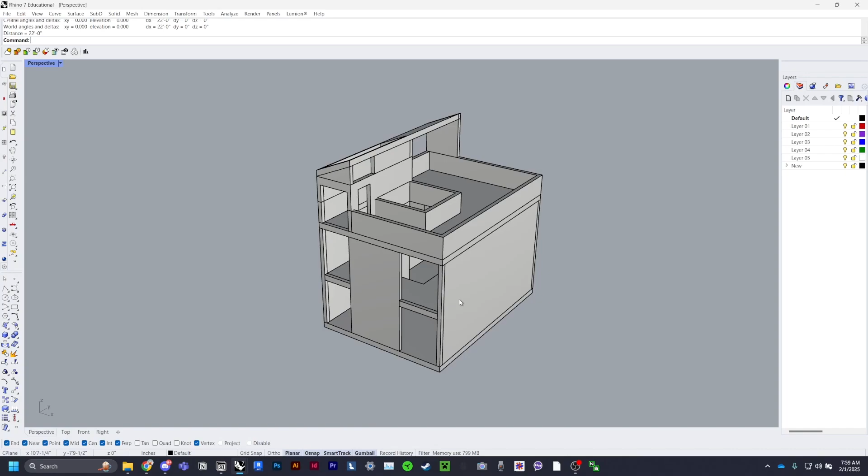Once you have your model in a separate Rhino file, select the layer you'll be working in, so 1/4 inch, and start making the floor, because every model needs a floor. Unless you know what you're doing, I recommend just starting with a floor.

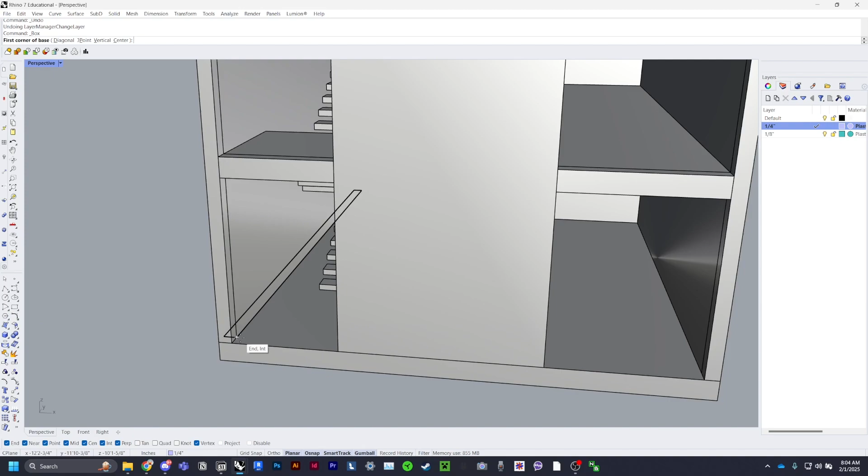Because I know it's 22 feet wide and 30 feet long, I'll click the box command to make a box that is 24 feet long, 32 feet deep, and 1 foot thick. Now I can move this into position by going from the inside corner 1 foot and minus 1 foot, and that's my base.

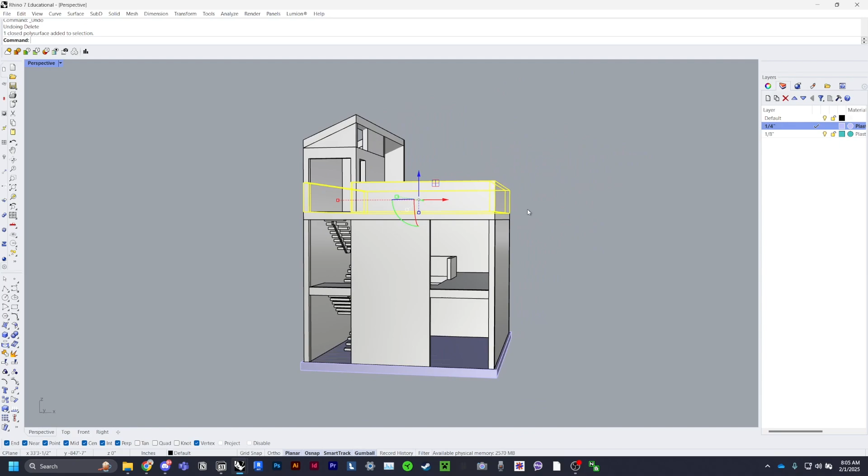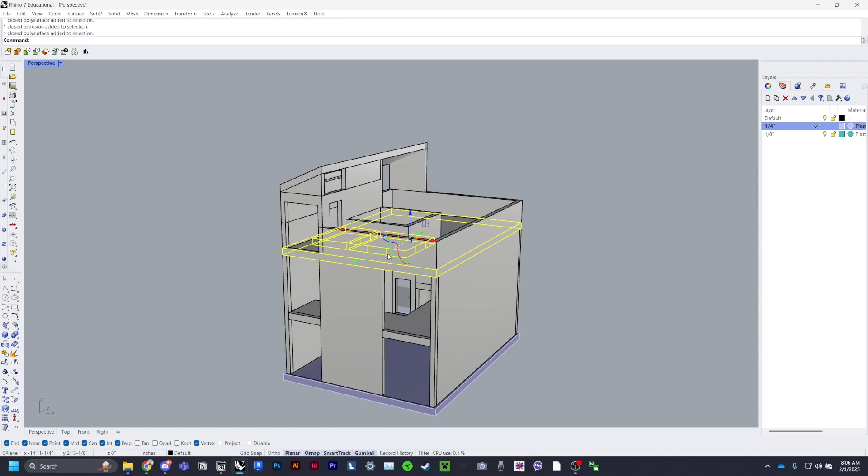In terms of how I want this to look, I want to be able to take off the top. So this top layer and the floor will be pretty much identical, except for the holes in the roof layer. This also means nothing should be connected to the top from the bottom or vice versa through this layer, unless you have a key feature, which I will go over.

For example, I want this wall to extend all the way through. Next, I'll start with the walls because those are relatively simple. Remember, I'm only going up to the bottom of this layer, because I don't want things connecting through the layer that I'm going to take off.

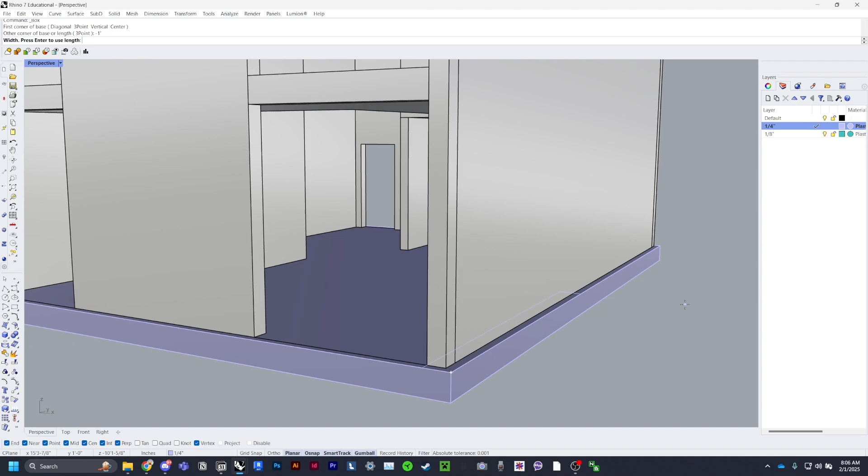So I'm going to start at the corner and go -1 feet, and that'll get me my wall thickness, and I can go all the way down here to this end. Now when I do -1 feet and 1 foot, those measurements might not be exactly like your model, because we might be designing in different directions. That's fine, just find out which way your model goes.

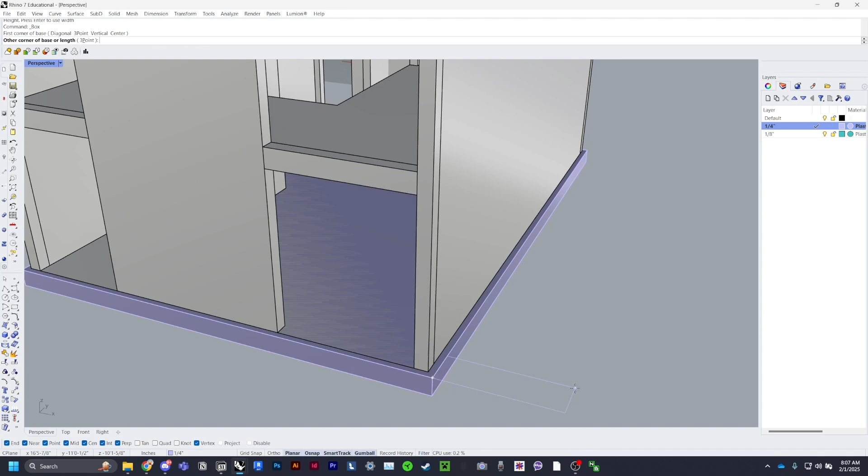For example, if I put in 1 foot here and then 30 or 32 feet, it's going to be to the right of my model, even though that's not where it is. If this ever happens, you can just use Move command and put it in place.

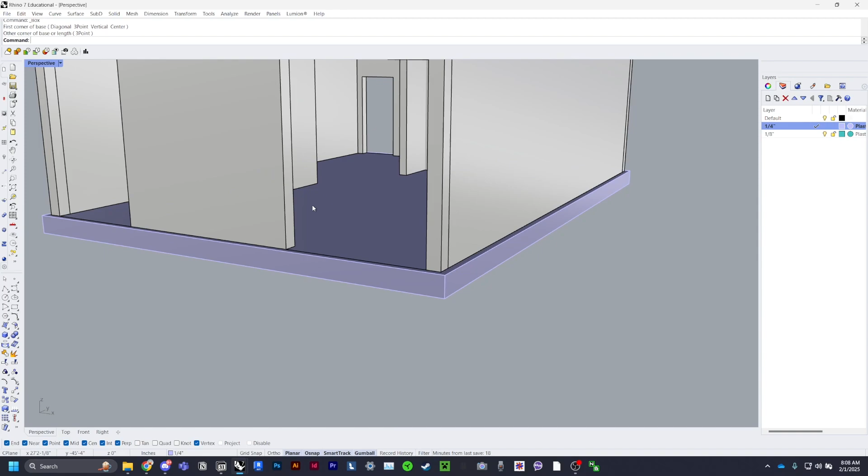Back to my model, -1 foot, that's inches. So if that keeps coming out in inches, you can go to File, Properties, Units, turn this to feet, okay, and scale model by that much, yes.

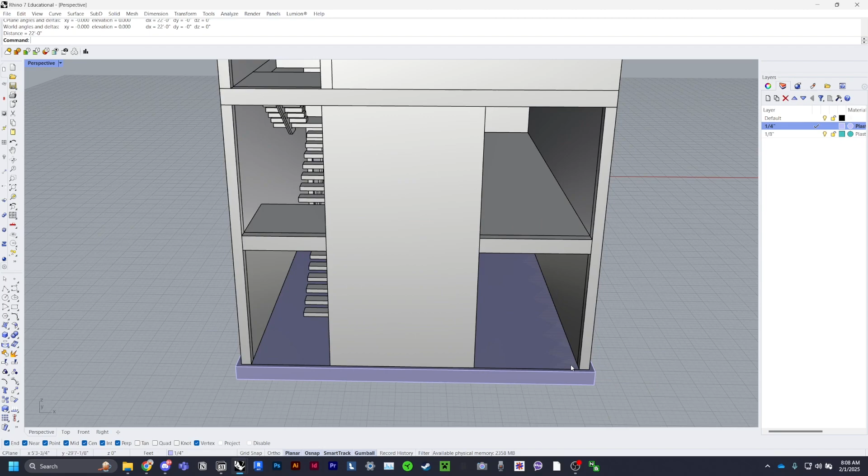Now by scaling it, it may sound like it changes things, but when you measure the distances again, it's still 22 feet. So keep moving forward, place the wall down, I can go -1, and that would mean a foot, so -1 is now a foot. I can go to this end, go up to the roof, and that's one wall done.

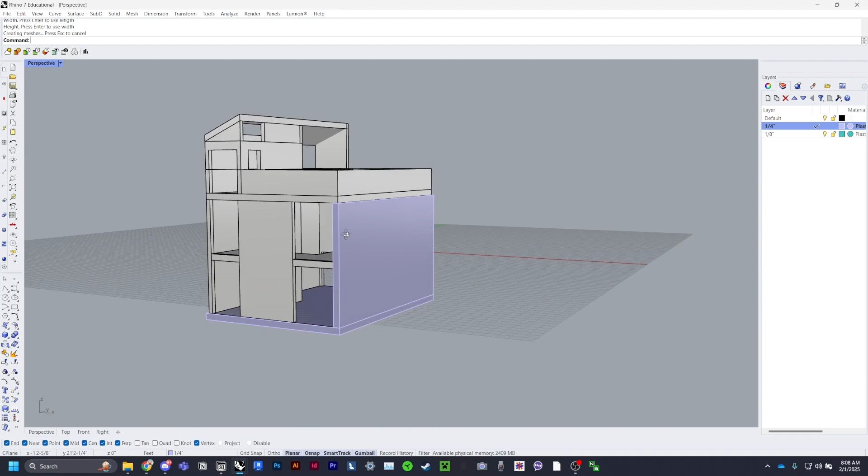For this project, I'm supposed to have the roof taken off, and I need to be able to take off one wall. I don't know which wall yet, but I want everything to look uniform. So if I have this wall here, I want to mirror it, using the mirror command, across the midpoint of the base, and that's both walls done.

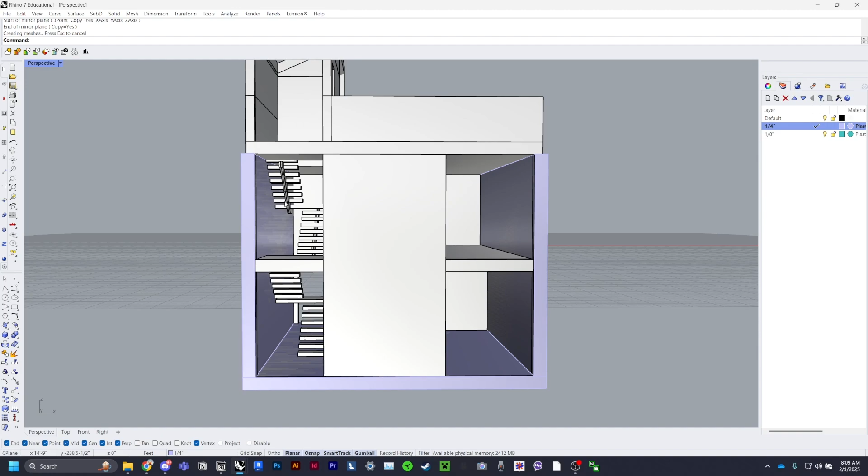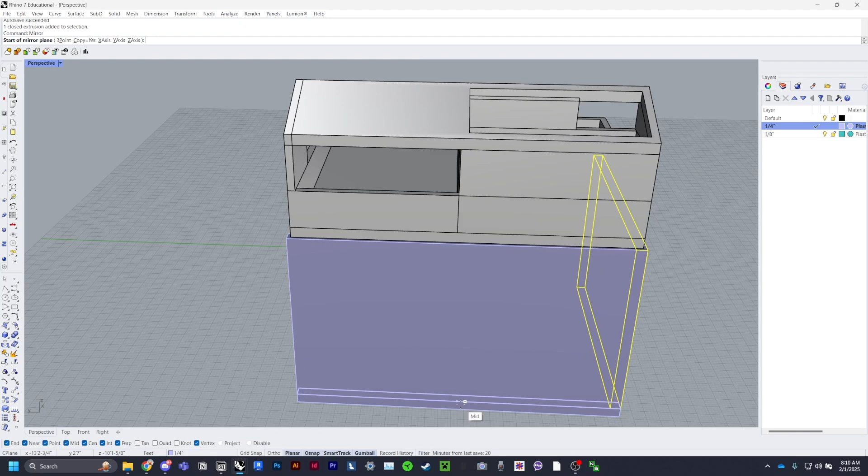What you can also do is create the front wall here. So that'll be 24 feet by 1 foot, go up to the ceiling, and then mirror this as well, midpoint to midpoint, or perpendicular, and those are your walls kind of done.

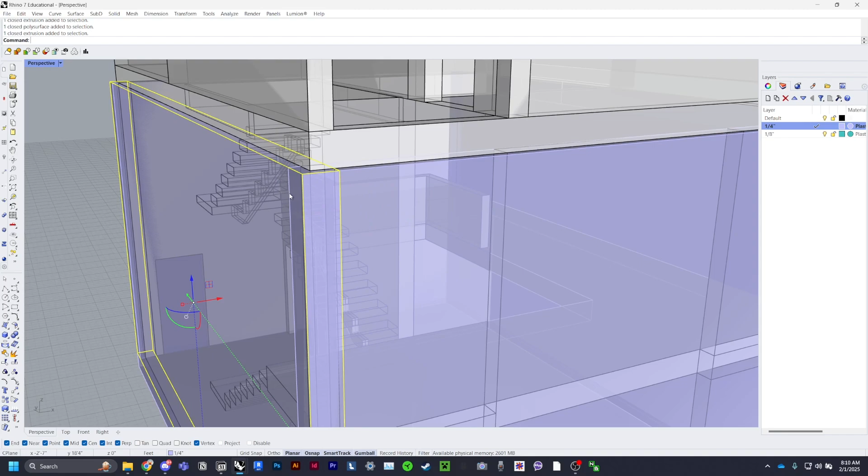So what I mean by that is go ahead and turn it to ghosted. You still have windows and doors to do. It depends on how you want your model to look, because if I build it like this, it's not going to fit, since these two right here overlap. So choose which one you want in the front, and make sure that one is always in front.

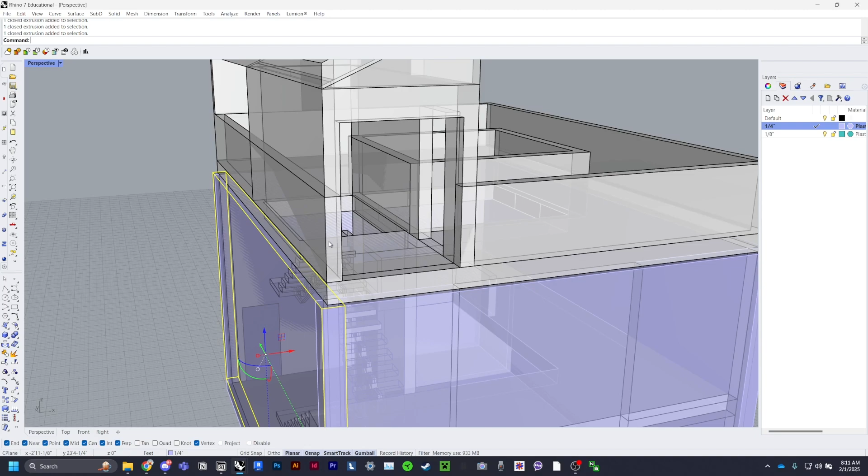For example, I want this wall to be on the edge, because I know this part here will also be burnt, taking in the color of the wood once it's done, so you have a burnt side and then the brown MDF face, or whatever material you're using. I want this to line up, so I'm going to have this wall be over this one right here.

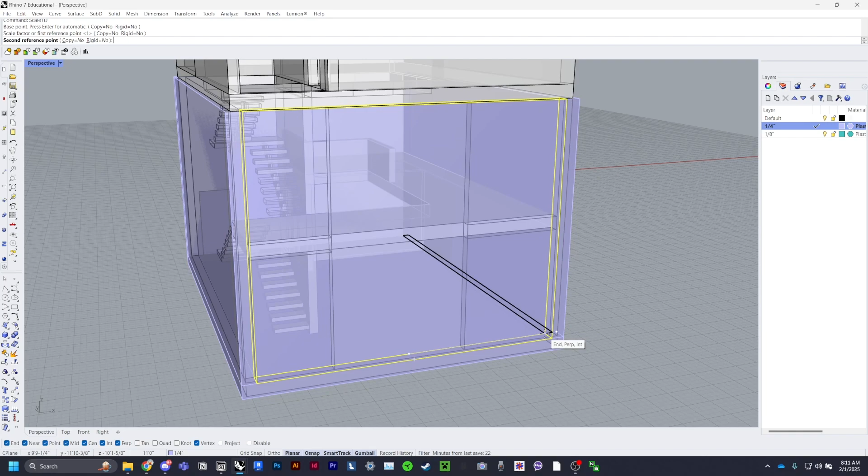To fix this, I'm going to scale 1D, go to the midpoint, select the outer edge, and move it in by a foot, and then that's a scaled wall.

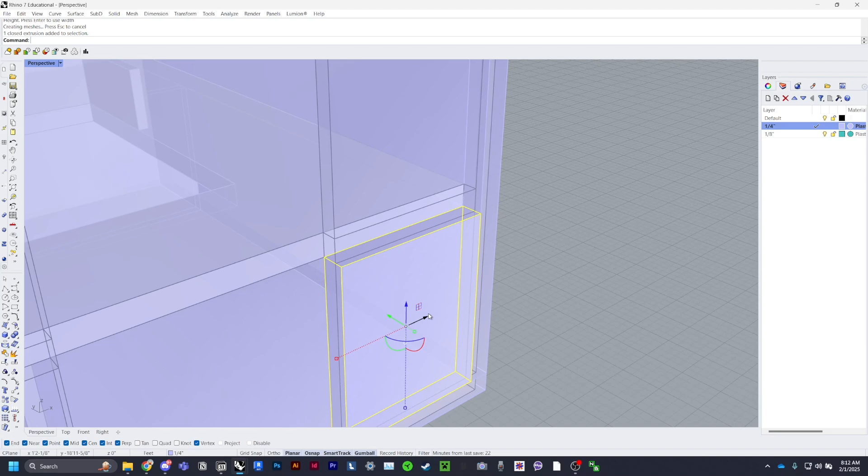Now to do windows, go ahead and click the box again. You have your window size already in your model, so you can copy that and go up to its height, and select the extrusion. If you have multiple windows of the same size, you can copy, select the corner, preferably inside so you know where it's going, then move it up, and that's 2 windows complete.

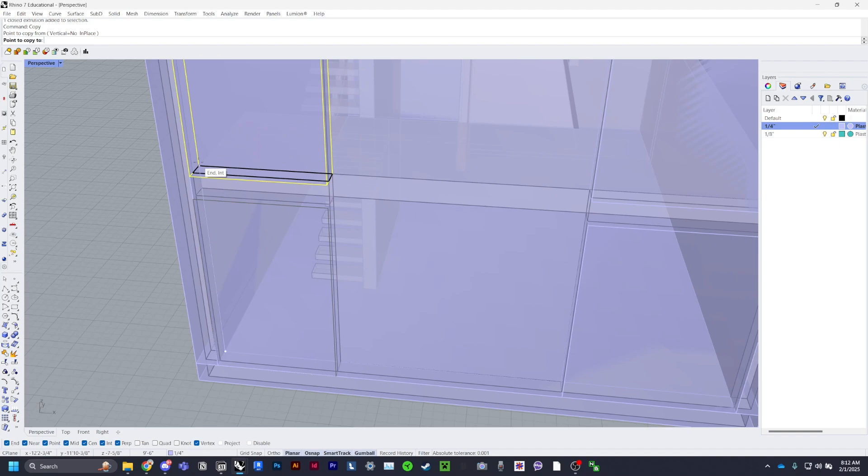Then box for your other windows if you have any. Go up to the height, copy, select, and move. Now, one of my favorite commands is Boolean difference.

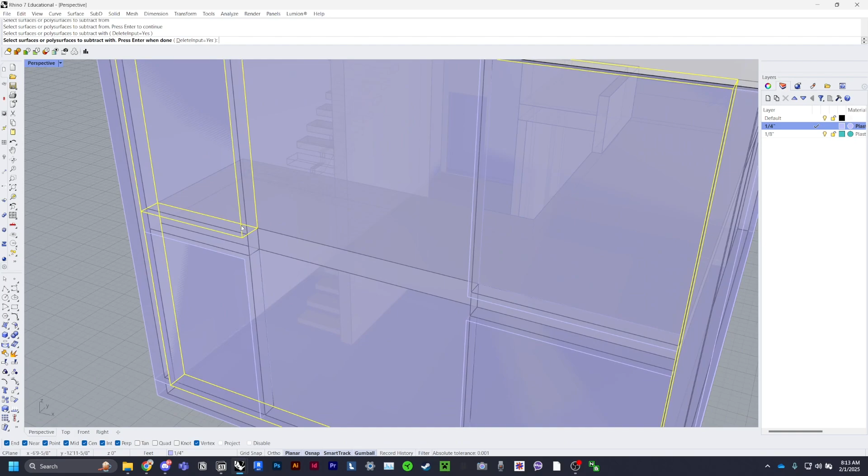Type in Boolean difference, enter, select surfaces or polysurfaces to subtract from. I'm going to select my wall, then enter, and then subtract with: select the windows you just created, and enter. This will count as one piece, and you can do this for your door as well.

So box, select where it's going to be. Oh, I almost forgot, before you do that, do scale 1D to make this wall the size you want it, so midpoint out to the end.

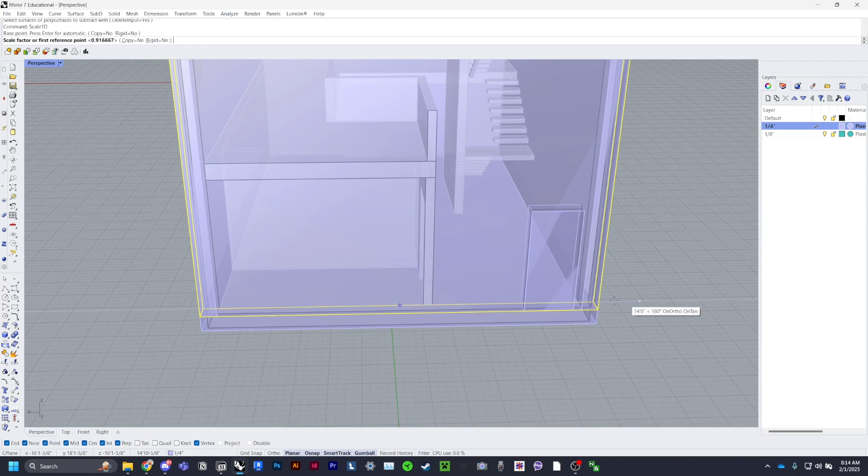I'm going to do this end because it's less cluttered, and then in 1 foot. Now select the wall, Boolean difference, select the door frame, and done.

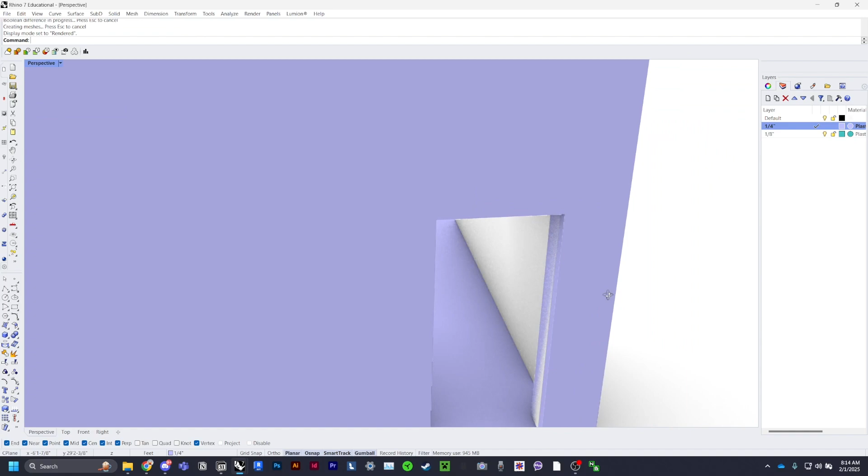So now if I turn it to rendered, let's say, you can see there is a surface here. Usually if you use trim, there will be no surface here, so Boolean difference just eliminates that use of surfaces.